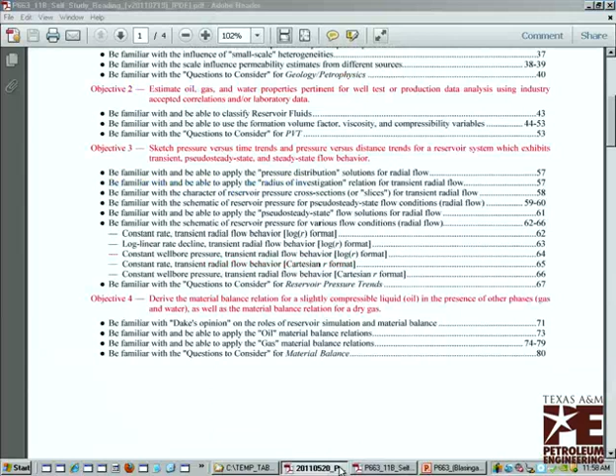You guys having a pretty good day? Not sure what to expect from me, right? Me either. I always get to be last, so I never really know what you know or what you don't know.

Sometimes it takes a little time to get to know each other. I haven't really gotten in my mind what I'm going to give you as an assignment. I believe you've had exams for the other two sections, correct?

I ordinarily don't like giving exams, mostly because I don't think exams are necessarily indicative of people's capabilities, but there's so many of you, we may have to do that. I think there's something like 30 in here, 25 in here, and another 30 online. But we'll come up with something. So as far as how we're going to evaluate the course, I'll come up with something. I know that's not very reassuring. The last thing I want to do is give an exam, but if that's what happens, then that's what happens.

We're going to be in here approximately 12 hours with each other. We'll cover quite a bit of material. Most of it is pre-packaged nicely. The real world isn't so nice. We're not actually going to use software. That's probably a bit of a surprise to most of you, since most well testing, pressure transient testing, and production data analysis is done with software.

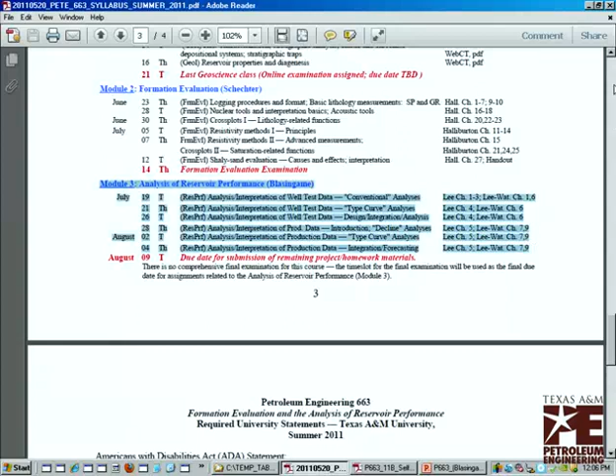Let me zip back. I've had several requests about whether you have to buy any other text or anything like that, and the answer, of course, is no. The texts referenced here are simply optional reading material.

There is a new SPE monograph out, and I apologize, the name of it eludes me. I think it is transient well testing, but it's written by Kamal et al. It came out in 2010. It's about as big as a brick. Not sure I'd recommend buying it because it's probably a couple hundred dollars, but maybe if you wanted it, you could.

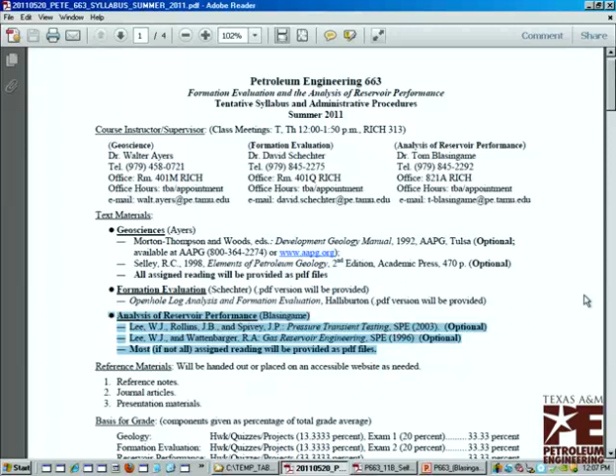Guess we could take a quick look and see.

It's nice to be able to spell, right? Yeah, who's got, oh my. Anybody want to read that to me?

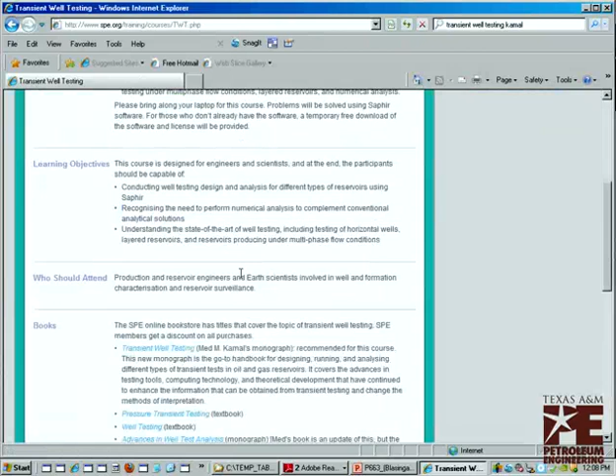Thought it was an SPE site. Let's try this. No? So the name of the transient well testing. Well, where's the monograph itself? That's not the right one. As you can see, I don't go here very often. About monographs. Am I just going out of my mind, or is it not obvious?

Yep, here it is. Okay, so base price is $280. Member price is $140. It came out in 2010, and it's written by arguably the experts in the field.

There's also a really good book. I'll throw a copy of it onto the site for you under references, by Kappa. Obviously, it is slanted towards their software. It's called DFA, or maybe they changed the name to something else, flow analysis. It's an excellent resource book, and I will put a copy of that as well.

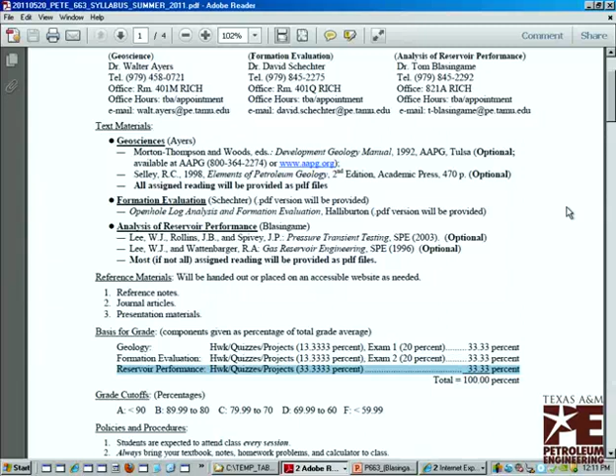Now, the next question probably on your mind is what's going to be expected? Obviously, you've already figured out that I expect you to be on time. It is now 12 minutes past the time to start. Okay, enough of that.

I made a little self-study. This is on the website. I can show you the website, and I'm sure the guys will put it on the DL site as well. It's under PETE 663 11B Blasingame, course notes, and right now it's the only file that's there. It's a self-studying reading file. So if you want to make a quick download of that for your own purposes, you can do that. Later today, the course notes files will be here.

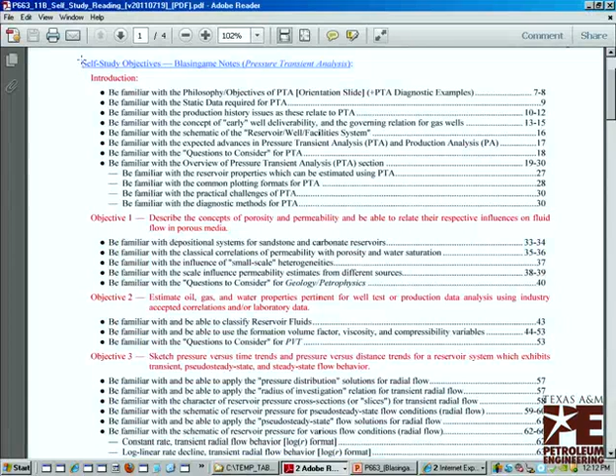Okay, so today what we're going to try to do, I'll do my best, is we'll try to make our way through somewhere around page 70, which is going to be a pretty healthy sprint for us, but the material that I've highlighted in blue includes sort of the basics. I'll rely on those of you who had PETE 648 to keep me honest, if I make a mistake, give me some orientation. But I will have a different opinion, and I will have a different structure of work than you had in PETE 648.

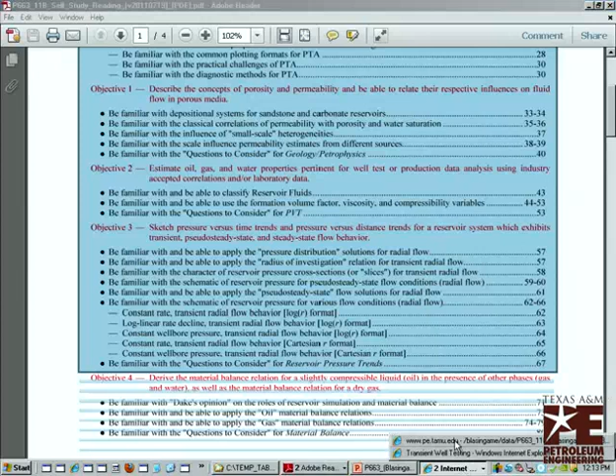Probably should also mention there are other versions of this material, or other versions of this course. I'm sure some of you have already done this. If you go back to the website, you'll see something called Course Archive. PETE 324 is the undergraduate pressure transient testing course, and you can see that I have all the years that I've taught it through there. PETE 324 2009 A was the last time I taught the course as an undergraduate course due to my part-time appointment, but there'll be a lot of information in here. I'm not saying I'm going to take anything from it, but there'll be a lot of information in here. So if you would like to utilize some of that information, you can. There are also versions of PETE 663 dating back to actually 02A, because that was PETE 689 was PETE 663. So you'll see various versions of that as well. All of this is free for your own use.

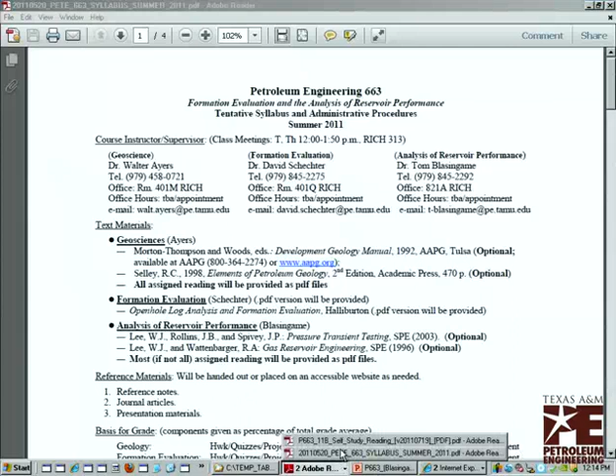Okay, if we come back, pardon me, to the list here. Are there any obvious things? There's going to be a lot of words today, but are there any obvious things that we've left out? We'll talk a bit about an introduction, then we'll talk about the concepts of porosity, permeability, oil and gas and water properties, and then we'll look at pressure versus time trends. Now, ordinarily, you probably skip the first three objectives because you've already had that. You've had some information from Dr. Ayers on reservoir properties. You probably had some information in your other coursework on estimating oil, gas, and water properties and so on. So that may be something you think you can skip. The introduction is useful. There's a little bit of historical perspective there. But probably in your mind you can skip objectives 1 and 2. We're not going to do that.

Good. What do you think is going to happen whenever you have a pressure transient test in a reservoir? What do you think the response is? I mean, think of the reservoir as a human body, and we're going to test it, we're going to stress it. Is there a certain expectation on your part about how things should behave, or how they shouldn't behave? For example, if I were to take your pulse continuously, would I learn that your feet are too big, or you can't see very well, or maybe you're overweight or underweight? What would I learn by taking your pulse continuously? Is there any idea there?

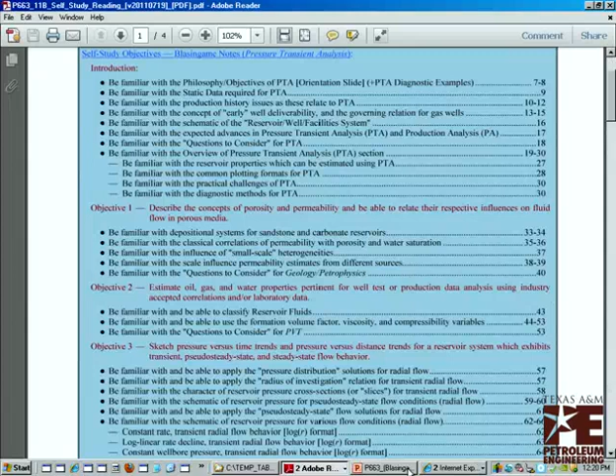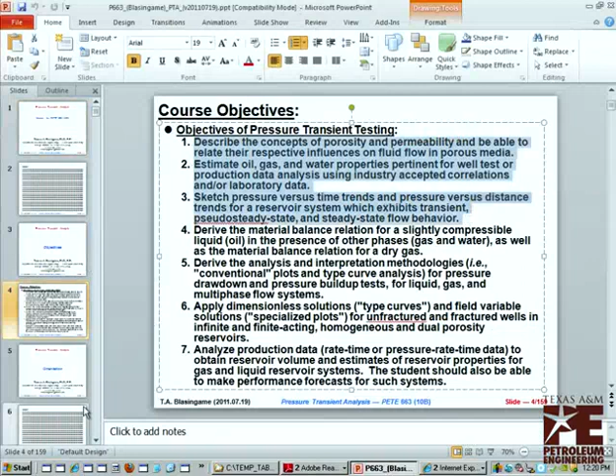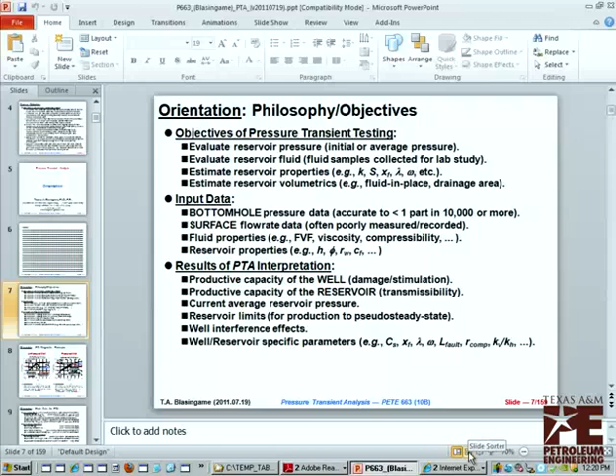Here's our objectives, and again, we're going to hopefully get through about number 3 today. By the way, I am not a Microsoft 2010 fanatic, so you'll have to bear with me. Let's see, this looks pretty good to you, right? Is there no way to turn this thing off now? I'll just get it out of the way.

Okay, so the objectives of pressure transient testing: we want to evaluate the reservoir pressure. That is the initial, or the average reservoir pressure.

Why do we need to know the initial reservoir pressure? It doesn't really seem like it's all that important. Why do we need to know it? To know how much you can recover from the reservoir. Okay, so from a material balance standpoint, it's critical. It represents the initial energy in the system. Coupled with the initial mass, we can determine how it's going to deplete and so on. Do you think people put a lot of effort into that?

No. Because when's the best time to estimate the initial reservoir pressure? Hence the word initial, at the start. And that means you have to have a gauge down in the bottom of the well. You have to have some sort of a measurement. So people don't really bother with that, especially when they have a lot of wells they're going to drill. Now, exploration wells, that's a whole other story. And offshore wells, that's a whole other story. You'll see a lot of effort put into initial testing. People are trying to get a good estimate of initial reservoir pressure. They're trying to get a good estimate of initial productivity. Why? Because they want to decide whether it's economic or not, whether it's technically feasible to produce.

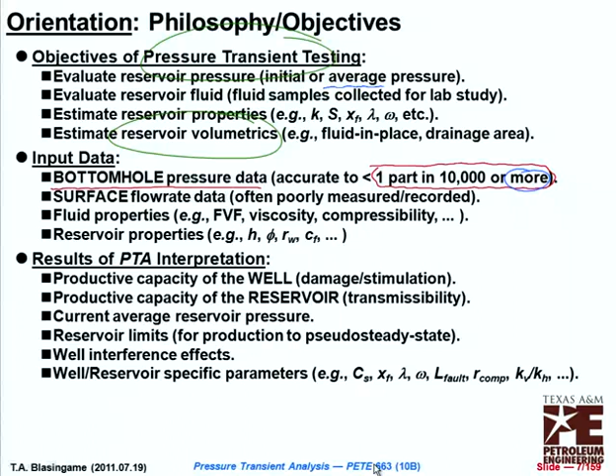Dr. Blasingame, you say there are cases that there's no signature in the production data that show well interference, but you feel that there are. Based on what did your research say? What we'll look for is a telltale signature in the depletion stem, like on a production data analysis stem, where you're looking at the backside, where depletion has a certain characteristic behavior.

It's a 1-to-1 ratio, let's say. If you have interference, then that ratio will be different. You'll see it on a production decline plot, you'll see it fall below. On a reciprocal production decline plot, you'll see it peel away vertically. In other words, it implies that there's some loss of energy in the system, or some loss of mass in the system.

The same thing would be true for water influx or for certain types of pressure support, where you would see an increase in performance relative to depletion. But I realize those are very subtle features, and I was discussing this the other day with someone who said, you know, it has to be well interference. And all the data are lined up beautifully on a material balance trend.

And I said, okay, show me. You know, I'm not saying I'm the expert, you're the novice. I'm saying help me to understand why you think there has to be well interference there. It says there has to be well interference there because if I put a well in between here, there's interference, then something bad's going to happen to me. I'm thinking, that's not evidence.

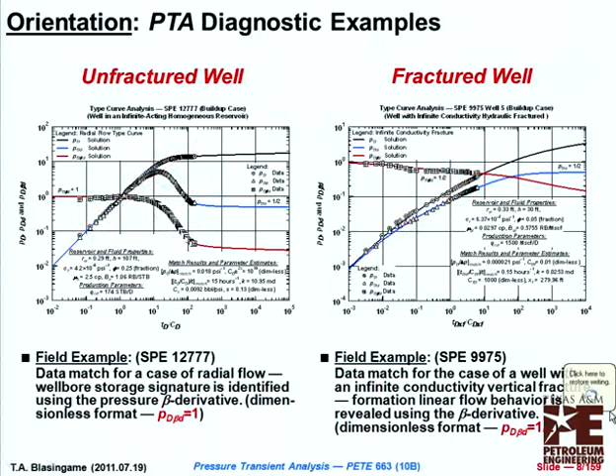I don't want to restore the writing.

Okay, these are static data for pressure transient analysis. Again, these are just things that you're going to need. I'll illuminate you quickly.

Whenever you see Ekman standard, Topaz standard, or Saphir standard, that's using constant properties, not for gas—for gas they use pressure-dependent properties. But if you're going to start putting in compositional changes, permeability changes, saturation changes, and so forth, you have a completely different model. You can't tell that, but you click that, it brings up the completely different model, and you run it. For right now, we're going to talk about very simplified analyses.

You're going to assume constant properties for a black oil. You can have pressure-dependent properties for a gas, and you should, in fact, do that. One of the things that frustrates me about Saphir and the other well testing packages is they always give you a button to turn off and on the pseudo pressure and pseudo time function.

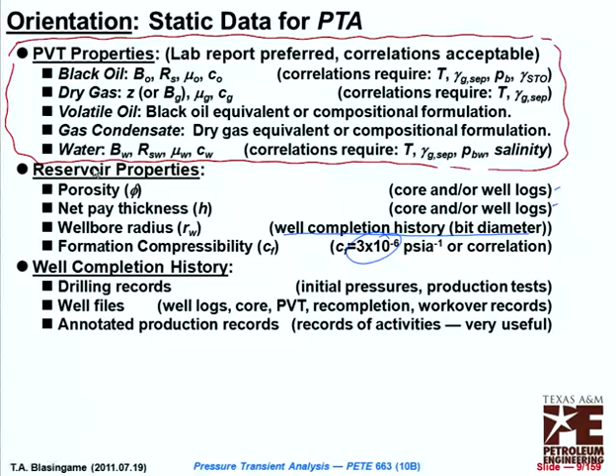So just be aware that completion history - you know, the old adage about always finding something in the last place you look - well, the completion history is probably going to be the last place you look.

Production histories, again, this is talking about how we would do this in general. In mature producing environments like Texas, you have allocated rates. Right now in Louisiana, there's a lot of things that are allocated as well on a lease basis. In Pennsylvania, the production records are confidential. In Indiana, they're absolutely unreported, which is really strange. They're common in a lot of offshore environments, and in that case you'll be looking at manifold rates.

The same thing would be true in places like Saudi Arabia. The allocation is going to depend on the records and on how often they do this, so be really careful with that. Pressure data...

I've probably become more forgiving about pressure data than I have about production data, because you feel sorry for it. But virtually all production measurements are taken at the surface. In the U.S., I'd say not virtually all, but all production pressure measurements are taken at the surface. There'll be a lot of downhole gauge data in the Gulf of Mexico, the North Sea, West Africa, and so on.

Who's looking at that data? Nobody. It's just being written on a hard drive somewhere, or written into a file somewhere. Why do they take that data offshore?

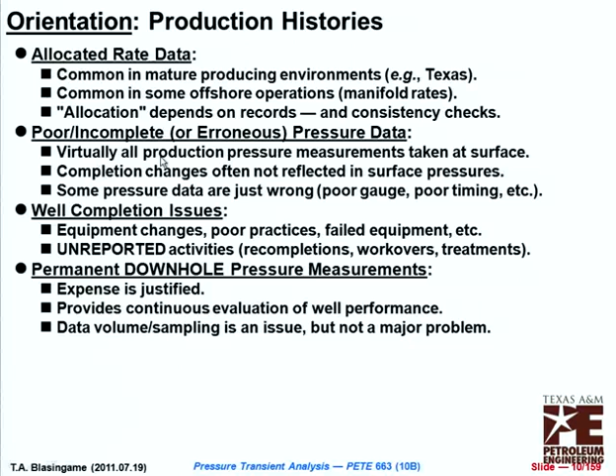Okay, this is a case history. I'll be honest, this is my second load, sometime later I'll show you my first load. But this is a case we worked on for a number of years. There's only about a year's worth of data here, but we got an update for it. It's a very clever case history.

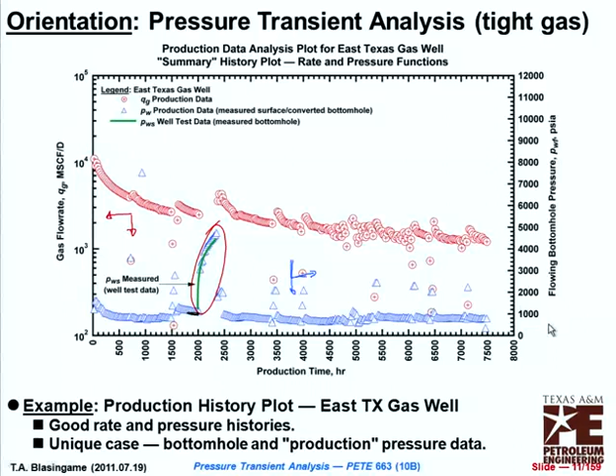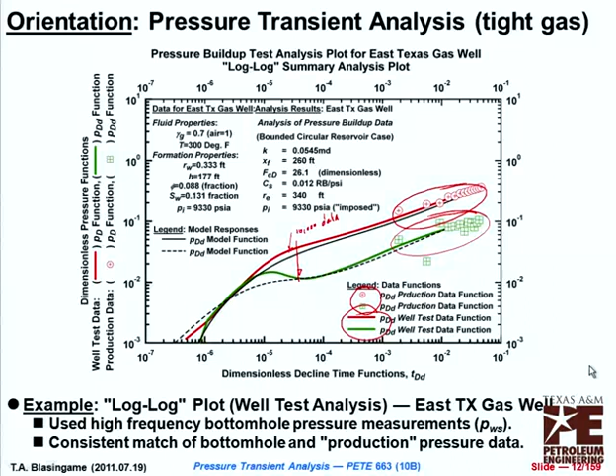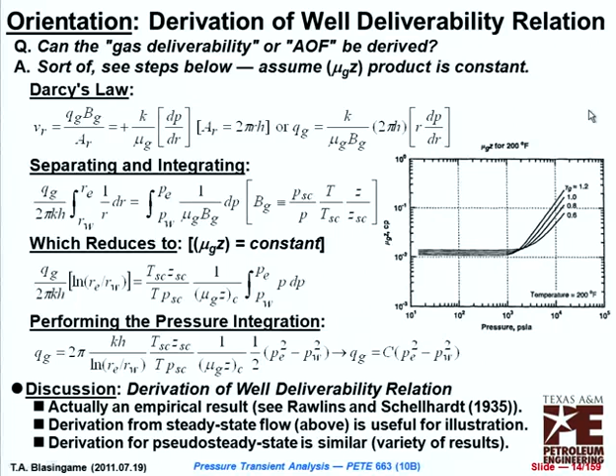So somebody came up with an empirical relationship. It can be derived directly for steady state flow. It can be derived sort of for transient flow. It can definitely be derived for pseudo-steady state in a variety of different fashions. So the real answer to the question is, so what? Well, I'm just trying to point out that from very simplistic beginnings is the start of an understanding of pressure transient analysis.

Now, looking at this particular slide, what's missing? If you tell me what's missing, I'll let you go. If you make me stay, I'll take it out. I'll torture you in the next 15 minutes. I'll torment your soul. You'll fall asleep tonight, you'll see this equation, and you'll recognize what's missing.

Time. Did I give you enough hints? Is time implicit in average reservoir pressure? Sort of, we can say it's sitting in there. But this does not describe pressure and rate behavior as a function of time. It describes it relative to each other.

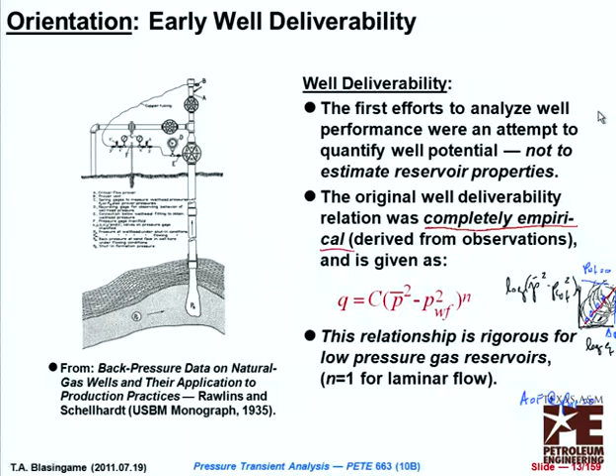I'm tired, man. You've been here 4 hours? Just 2? It just seems like 4. You weren't in here before.